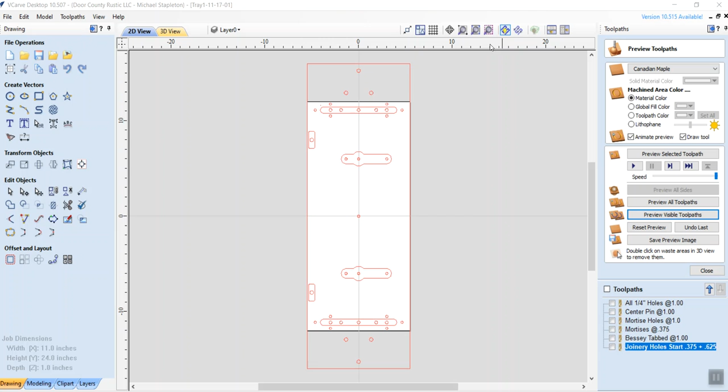I'm going to zoom in so I make sure I get everything right. I'm going to go in there. I'm going to select that one. Then I'll go down and I'll shift and select, so I'd have both of those. I'll just double check. Yep, I have both of those. Okay, then I'm going to create a toolpath for that.

And the other part of it was, just as I had mentioned, you don't want to start like these holes. They all started at 0.375 and then went down 0.625 further. Well, that first pass on each one of those holes, that's when I realized, wow, why is that going so deep and then making a spin to do a 3/8 inch hole? Well, then I realized I never did the slot first.

So that's why a lot of times it may not be all that good of an idea to start from a certain height and then finish, because if you screw up the sequence, then you're really in trouble. So all I'm going to do is start at 0 on these two slots, and I want to go down 0.375.

I'm going down 3/8, and the reason I'm doing that is because the piece of metal that's going in there is 1 inch, and then there's going to be a head that's going to stick up, and I don't want that head to stick up any further than it has to. So it's going to take a little longer to do this, because it has 3 passes rather than 2, but in the end I think I'm going to be glad that I did.

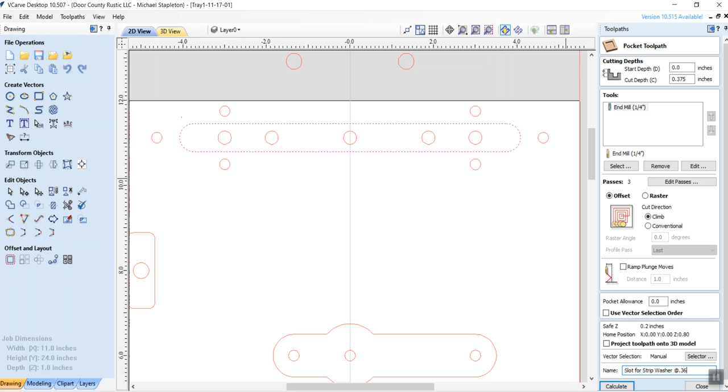And then I am going to name that slot for, I guess I call it a strip washer. It's like a strip of metal, and then it's at 0.375. Calculate. All right, this is where I'm going to really want to watch to make sure what I've got.

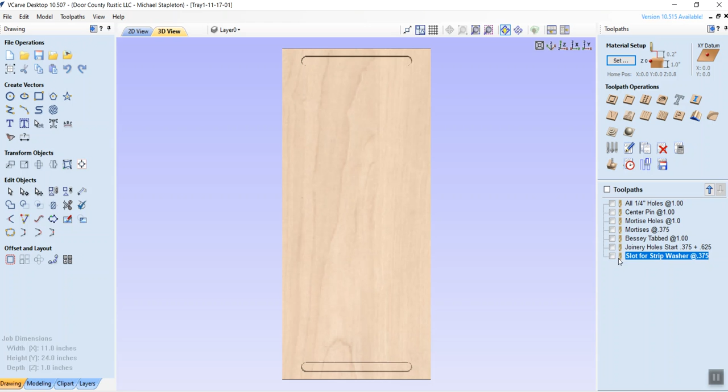I clicked on reset, and so now I don't have any of the other ones selected other than slot for the strip washer, and I can go ahead and test it. Okay, so it ran those two, right? Now, when I set up my toolpath to take out into the shop, I'm only going to select that particular one. I'm not selecting any of the other ones. Now, when I save the toolpath, I'm double checking to make sure just that one is checked.

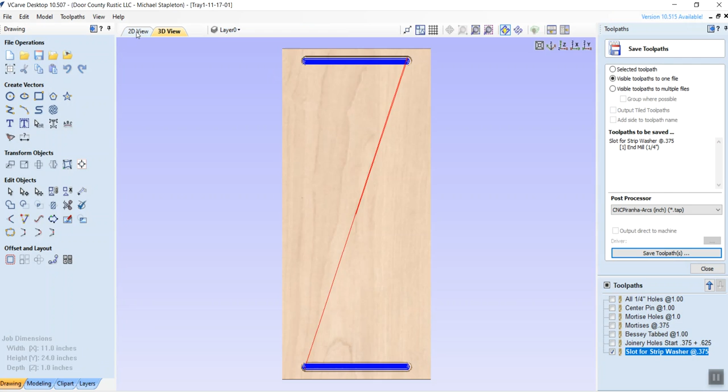I do a save, and then I usually call this whatever I did, fix. I add the word fix to it, and that kind of lets me know. There you go. So it's fixed, and I do a save of that. And then, let's assume that everything is going to work out from this point forward after I do it in the shop, then I'm going to save this file, which is the CRV file, and I'm going to do a save as.

This is where I use that numbering system, tray 1-1117-01, and really what I'm going to do is just call that 02. That way they're up in sequence, and so I'll know that there's something else different there. So now I'm all set to go. All I need to do again is put my thumb drive in the computer, transfer the file from my computer to the thumb drive, take the thumb drive out to the shop.

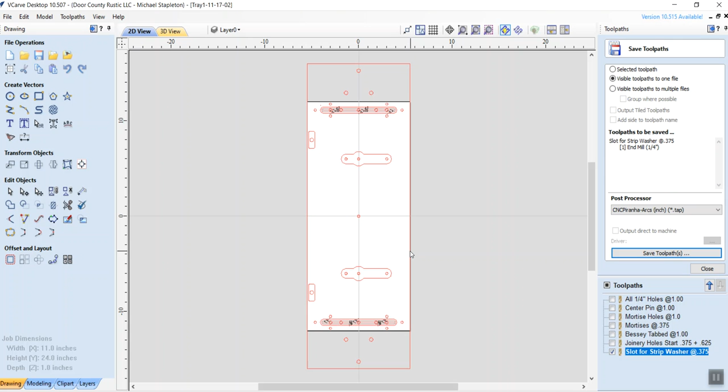Then when I get out to the shop, I'll go ahead, enter. The board is already in the machine, it's already centered. The only thing I have to do is bring it down to 0 manually and then tell it to go, but when it goes, it's only going to do these 2 passes right here. So there you go.